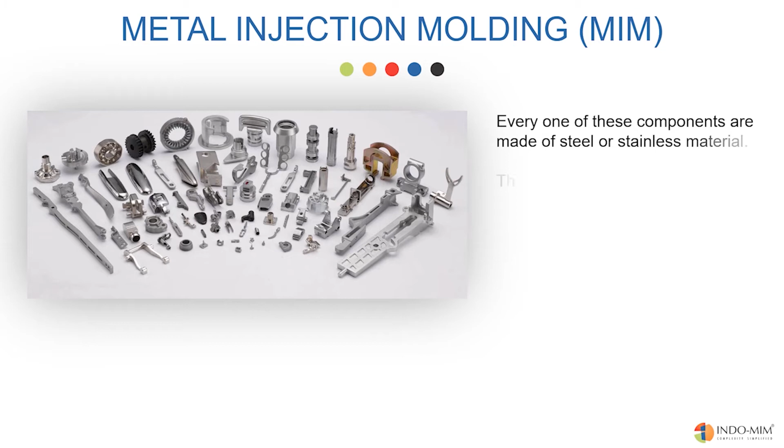Now, look at the pretty components on the screen. They are all made of steel or stainless material, and they are produced in high volumes, tens of thousands to millions per year. What if we asked you to produce them in a CNC machine shop? Impossible, right? Don't worry, we have Mr. MIM to your help. With the MIM process, you can produce thousands of parts per day without even getting near a metal cutting machine. Let's understand what this wonder process is.

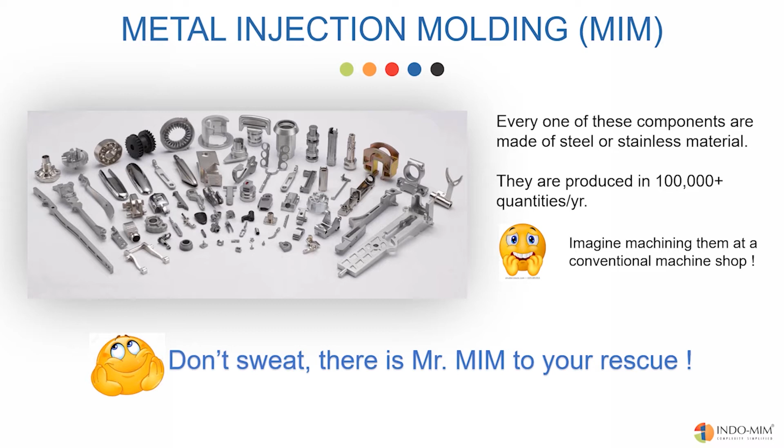Do you remember the conventional powder metal process? It's also called press and sinter. In this process, we take metal powders, press them with high pressure in a die using top and bottom punches, add some core pins to produce holes, etc. The pressed parts are sintered in a furnace to get to 90% of the material density. Great process, but not good enough, because the process can produce only two-dimensional shapes and poor material properties because of low density.

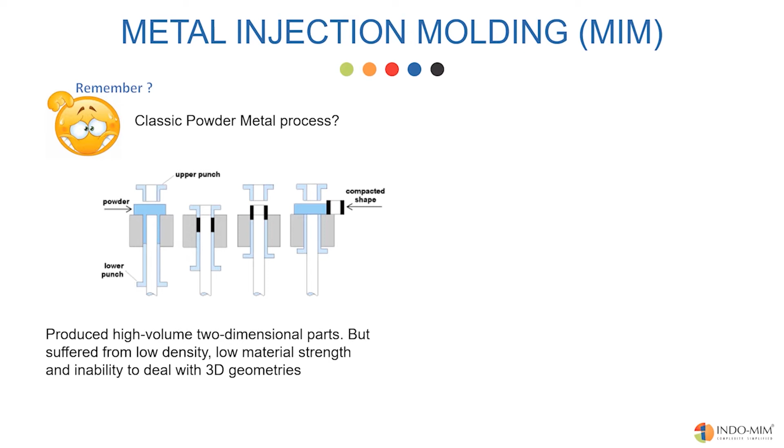Now, you also know the plastic injection molding process. Who doesn't? Injection molding process allows you to produce complex three-dimensional shapes. But this process can deal with plastic and low-melting materials like zinc and aluminum. Wait a minute. How about injection molding of the metal powders instead of just pressing?

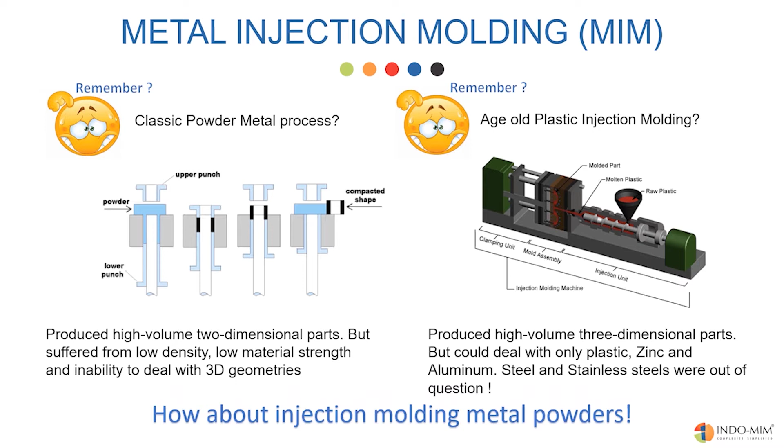You can't? No. Yes, you can. Just mix the powder with a little plastic binder. The mix flows like semi-solid material under heat and pressure. So, let's ask powder metal and injection molding to marry each other and see what happens. And they said yes. Metal injection molding was essentially a marriage between two existing processes, powder metal and plastic injection molding. The marriage happened around the mid-80s. Sorry, we weren't around. But here we are now to take the benefits of that marriage.

That's all that matters. Metal injection molding is a simple four-step process. Step 1: mix the metal powders with some binder, usually a mix of polymers and wax. Mixing is done under heat so that the binder material melts and coats each metal particle. This produces a homogeneous mix. The mix is converted into small pellets for easy storage and transfer. At this stage, the mix is called MIM feedstock.

Producing MIM feedstock is a highly specialized process. Most of the MIM companies buy ready-to-mold feedstock from a third party. We, at Indo-MIM, produce our own feedstock in-house. Producing feedstock in-house provides a lot of cost advantage, and we can monitor the quality better.

Step 2: the feedstock is injection molded into complex shapes using plastic injection molding machines. During the injection molding process, the MIM feedstock is heated just enough to melt the plastic. So essentially, we inject semi-solid material into a custom-made mold. A molded shape is only a consolidation of the metal powder with the help of plastic. At this stage, the parts are called green parts. The green parts should be handled delicately to avoid damage.

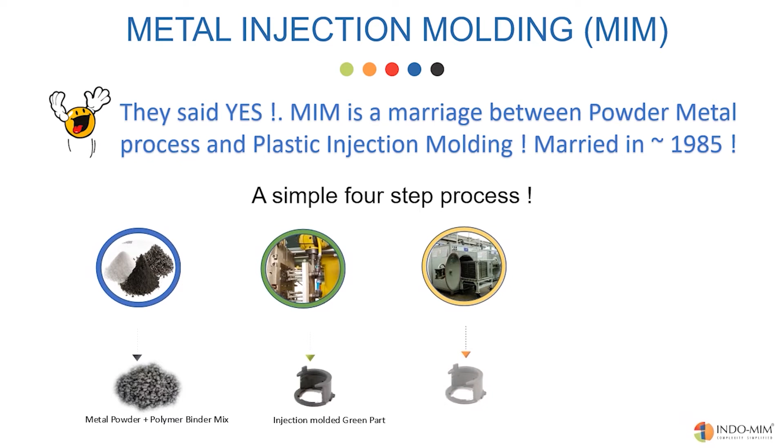Step 3 is to remove part of the binders. The process is called debinding. After this process, the components are called brown parts. The last step is to sinter the brown parts and remove all the binders added. During sintering, the high temperatures enable the metal particles to diffuse with each other to get to 97% minimum density.

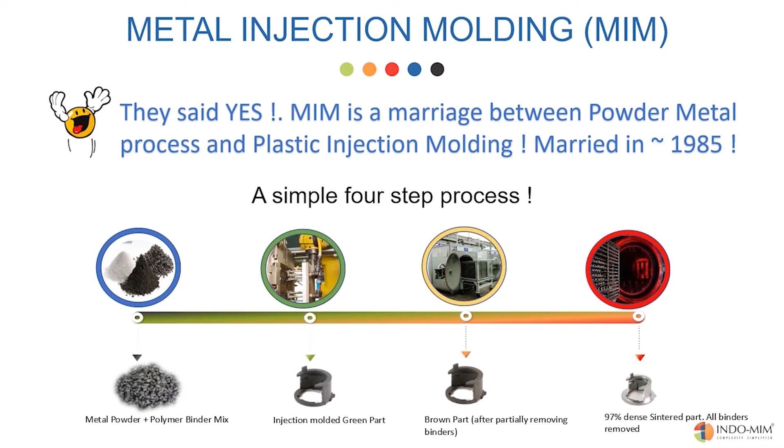After the sintering, the components are 100% metal with no binder material in them. Hence, they display very similar material properties as corresponding wrought material. So, we made complex shaped metal parts without even getting anywhere near a metal cutting machine. Still don't believe it? Let us watch a video of the process.

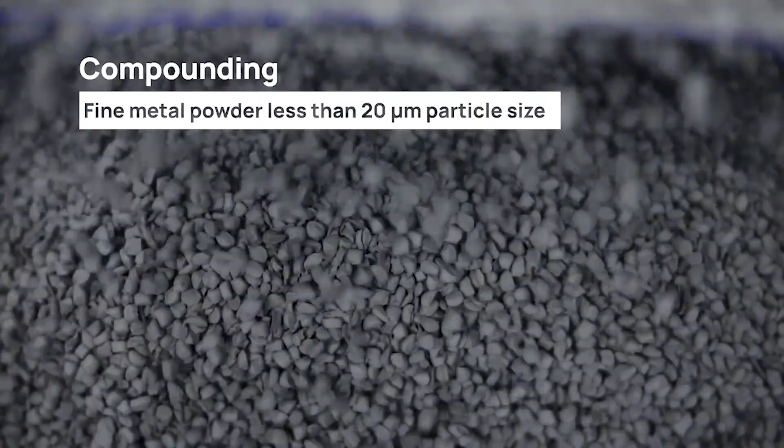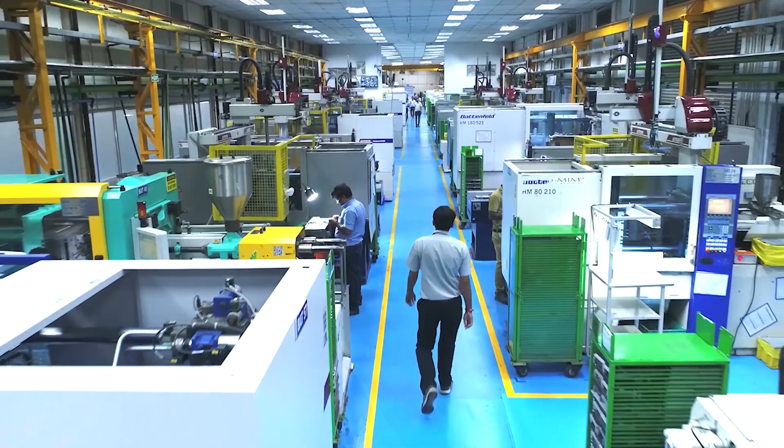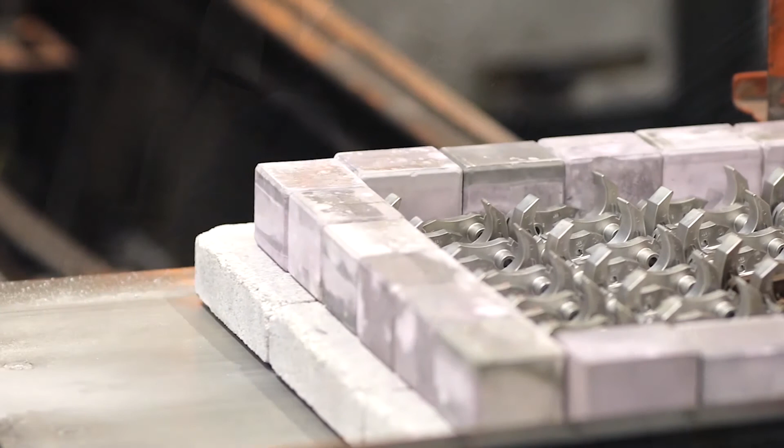This short video was shot at our plant in Bangalore, India. The MIM process begins with compounding, manufacturing fine metal powder which blends with thermoplastic and wax binders in proportional amounts to make the feedstock. The feedstock is injected into the metal mold to form the net shape at molding. After this process, the solvent extraction process is used for removal of primary binders at the debinding process. The last stage occurs in batch vacuum furnaces or continuous furnaces, to remove secondary binders and densify the component, which is coined as sintering.

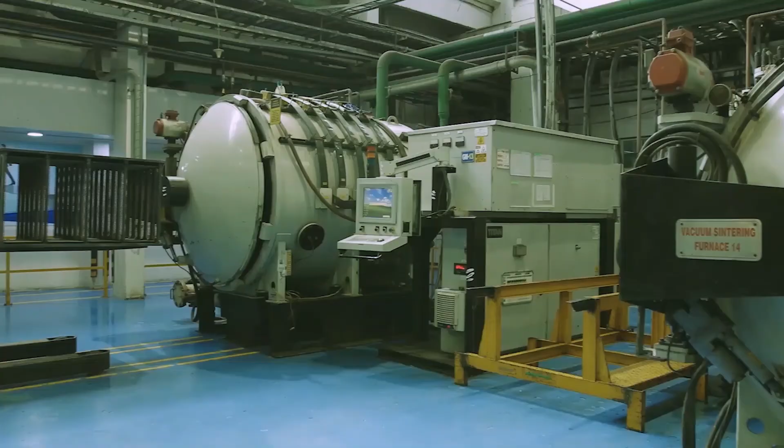After sintering, MIM goes for required heat treatment and special processes to enhance the material properties. The final products go through standard checks for quality assurance before being delivered to the customers.

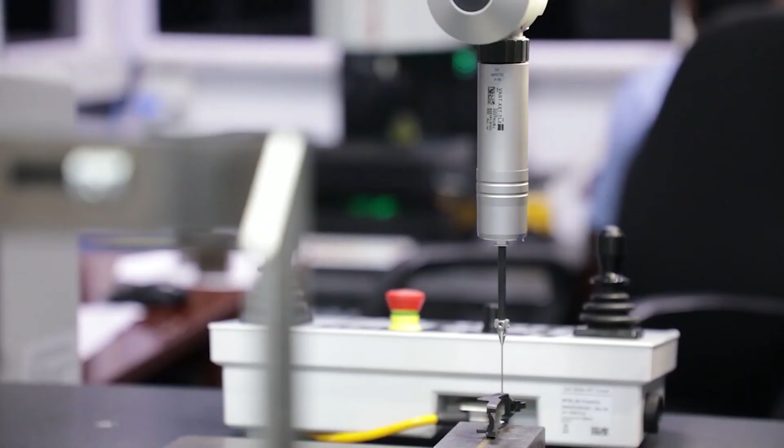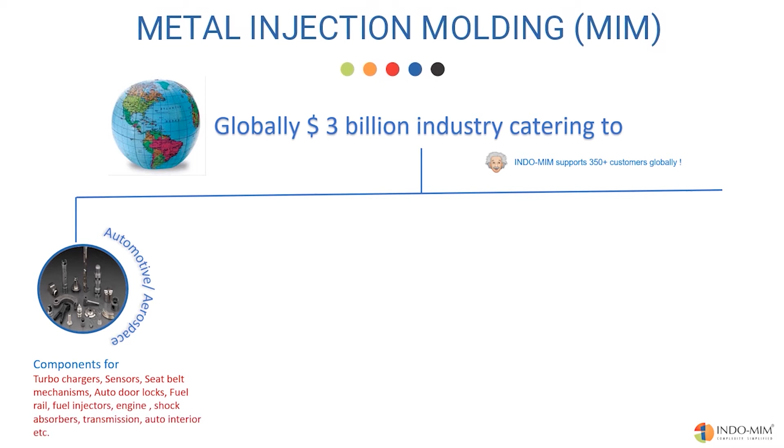What started as a science project in the 80s has grown into a $3 billion global industry, growing at 20%. Applications of metal injection molding are found in almost every known industry: automotive, consumer products, firearms and sporting goods, medical devices, and electronics are some of the broad categories of the global market.

If you have small intricate steel or stainless steel components, MIM will be your preferred process. Automotive companies like Garrett, BorgWarner, Mitsubishi, Bosch, ZF, Cummins, Caterpillar, etc. use a large number of MIM components in their assemblies.

The Lightning connector on your iPhone is a MIM component. Apple alone consumes $600 million worth of MIM components in a year.

If you own a handgun made in the USA, you've probably seen several MIM components on it. A typical handgun has 15 MIM components in it.

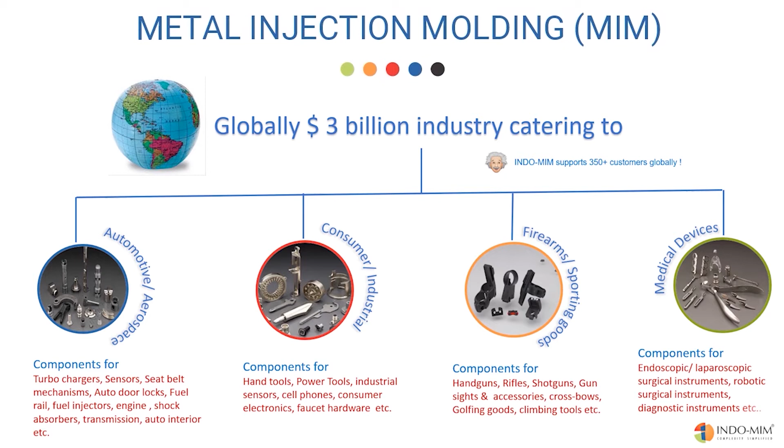Pretty much every mass-produced endoscopic or laparoscopic surgical device has MIM components in it. INDO-MIM alone developed 6,500 plus varieties of MIM applications in the last two decades. We service 350 plus customers globally.

Okay, looks like you're on board now. Let's discuss the nuts and bolts of the process in more detail.

Step 1 is mixing the metal powder with binders. This step is called compounding. Metal powders are normally produced through gas atomizing. The gas atomization process produces spherical-shaped particles. Round-shaped particles flow better during the molding process.

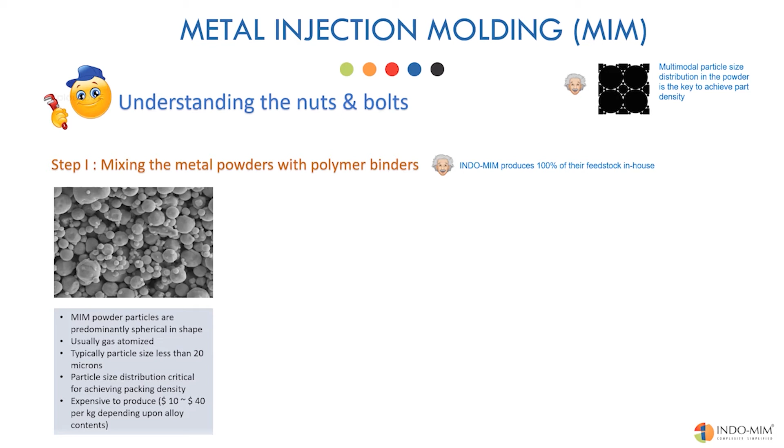Typically, MIM powder particles are less than 20 microns, significantly smaller than metal powders used for conventional press and sinter processes. The powder contains particles between 3 microns to 20 microns in precisely maintained particle size distributions. This is extremely critical to achieve the best possible powder packing in a molded component.

Metal powders can be an element mix of various alloying elements or pre-alloyed, depending on the final chemistry required. Most of the stainless steel and nickel superalloys are pre-alloyed.

MIM powders are expensive to produce because of the small particle size and tight controls on particle size distribution. They cost between $10 to $40 per kilogram, depending upon the alloy content. Most of the MIM powder producers are located in Europe, Japan, and China. MIM powder costs are among the main cost drivers in a MIM component.

Hence, larger size components don't make good MIM candidates. Normally, components less than 100 grams are economically viable through the MIM process. At INDO-MIM, we find the 0.20 to 30 grams weight range the sweet spot.

Binders are normally a mix of commonly available polymers and wax. Most MIM companies in the world use a wax polymer recipe for feedstock. The actual recipe is commonly considered proprietary information. As the metal powders are completely covered with the polymers during the mixing process, the MIM feedstock has a very long shelf life.

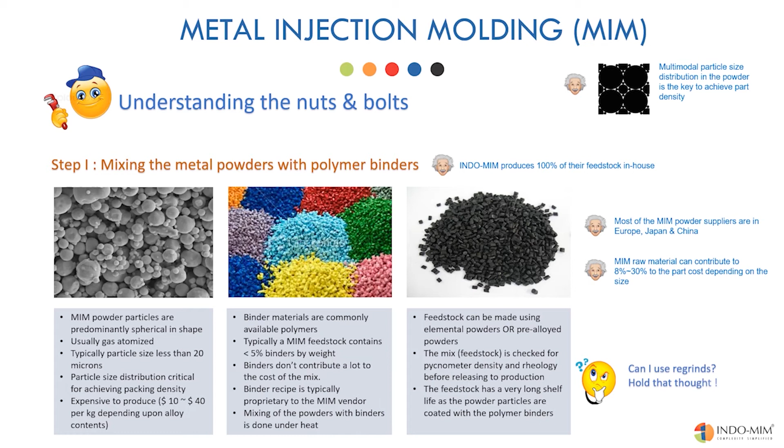The MIM process offers a wide variety of engineering steel, stainless steel, and industrial ceramics. INDO-MIM offers 80-plus material options, significantly larger than our nearest competition. Our in-house R&D material development team continues to add to the list on a regular basis. As you see, for every engineering application there is a MIM material option.

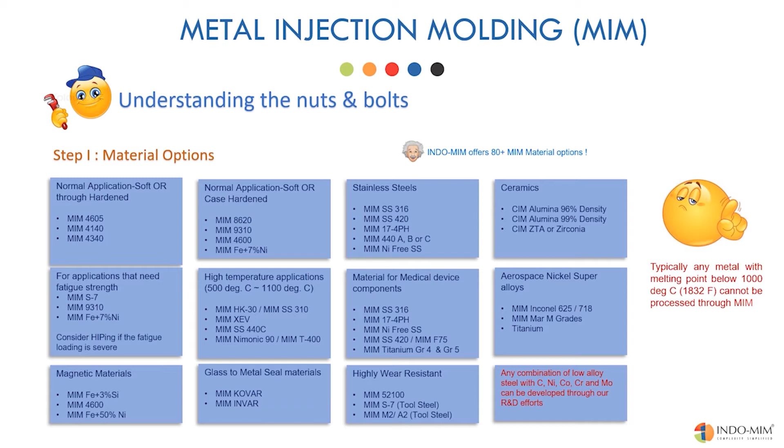However, please remember that any metal that melts below 1000 degrees Celsius, or 1832 degrees Fahrenheit, cannot be processed through MIM easily. Hence, you may not find a MIM company that would deal with metals like aluminum, zinc, copper, etc.

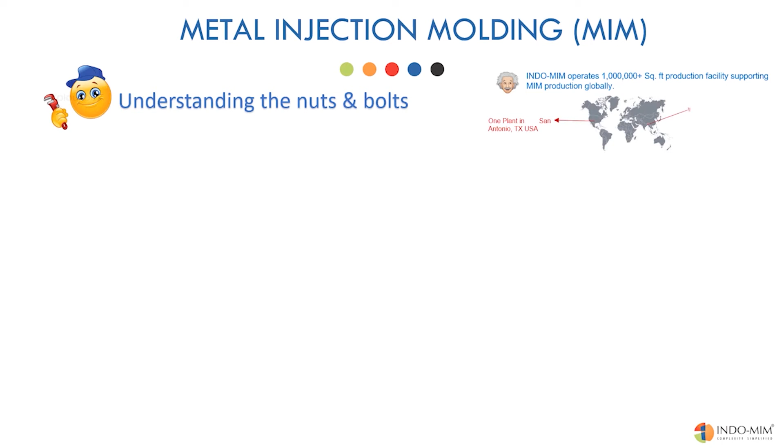Step 2 is injection molding of the feedstock. This process is very similar to plastic injection molding. As a matter of fact, we use the same machines used for plastic injection molding. However, there are some differences.

The molding temperatures are just enough to melt the binders added, so essentially we are injection molding a semi-solid material. Hence, MIM molding requires much higher pressure. This means MIM molding machines are usually oversized. Also, given that the metal powders are abrasive, the screw and barrels are made of special material.

During the molding cycle, the molds are both heated and cooled. The injection pressures, injection speed, and a host of other molding parameters are monitored using a closed-loop system. Hence, MIM molding machines are usually CNC controlled.

The molded parts, now called green parts, are normally picked by robots and placed on ceramic trays. Remember, at this stage they are just metal powder held together by plastic binders. They have to be handled delicately to avoid any damage.

The runners are normally reground and reused after mixing them with the virgin feedstock. We will discuss more about this in the subsequent slides.

Now let's talk about the molds. The molds are made with the usual tool steels, commonly used for plastic injection molding. However, as the MIM feedstock is abrasive, the mold life is usually smaller than in plastic molding. We guarantee 300,000 shots mold life before replacement is needed.

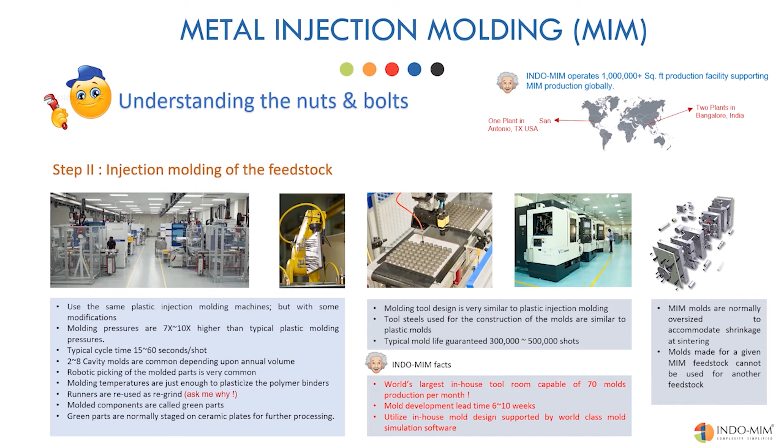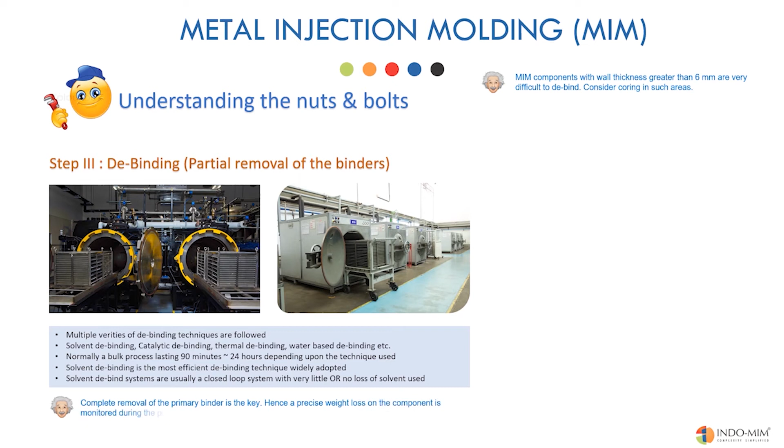Moving on to step 3. Once the feedstock is molded into shape, we don't need the plastic binders on the parts. The process of partially removing the binders is called debinding. The MIM binders are broadly categorized into 2 categories, primary and secondary binders. At the debinding stage, we remove the primary binders through a solvent extraction method.

Debinding technique depends on the binder recipe used. Some MIM vendors use catalytic debinding and some use thermal process. Solvent-based process is the most economical and efficient method.

As you can see, the green stuff inside the green part is all gone after debinding. The part at this stage is called a brown part. The weight loss on the components is closely monitored during the debinding process. The entire process is done in an automated closed-loop system. The solvent used in the extraction process is regenerated.

Debinding cycle times depend on the wall thickness of the parts. Thick-walled components take longer to debind. Components with wall thickness greater than 6 millimeters are difficult to debind.

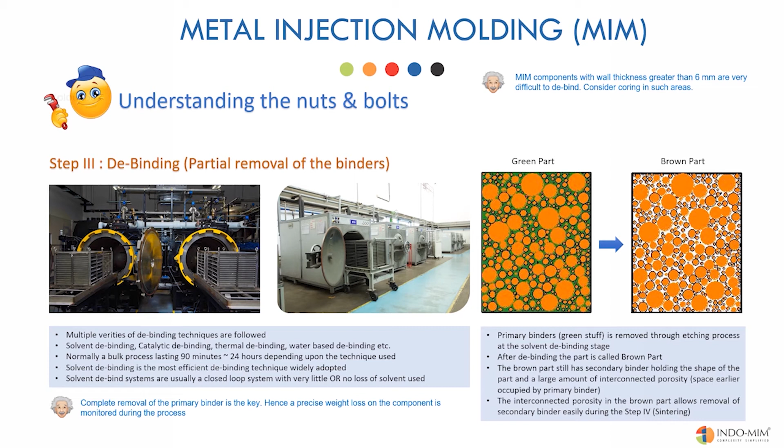During the debinding process, we achieve 2 important things. One, we remove the primary binders from the components. Two, we create a fine network of interconnected porosity in the component, which helps us remove the secondary binder during sintering, the last stage in the MIM process. All the space occupied by the primary binder is now a network of porosity.

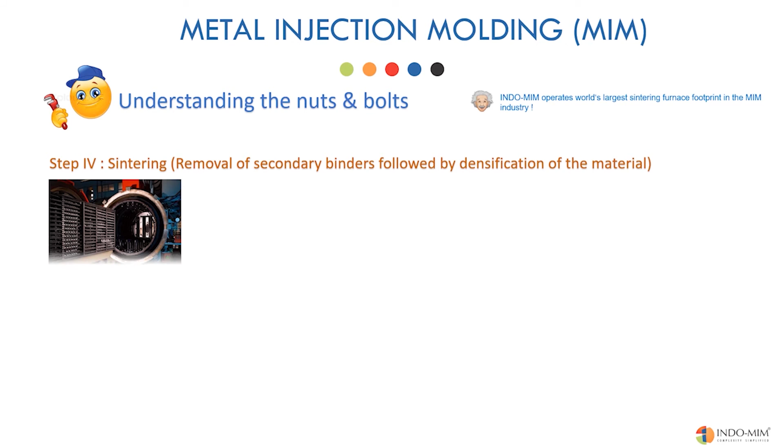Sintering is the last stage. Brown parts are now moved to sintering ovens. Sintering furnaces can be batch type or continuous type. Batch sintering furnaces are usually vacuum furnaces with nitrogen, argon, or hydrogen cover gas. Continuous furnaces use a combination of nitrogen and hydrogen gases as the cover gas.

Sintering temperatures depend on the material, usually ranging between 2,300 degrees Fahrenheit and 2,500 degrees Fahrenheit. Sintering cycles are between 25 and 35 hours long. The first 12 hours of the cycle are spent removing the secondary binders through a thermal debinding process.

After all the binders are removed, the furnace temperature is ramped up rapidly to the soaking temperature where the metal particles diffuse with each other. At the end of the sintering process, all the particle boundaries are replaced by grain boundaries. At this stage, the component shrinks by a specific percentage, squeezing out all the empty space left behind by the binders. The shrinkage is mostly isotropic, meaning the component shrinks at the same percentage in all directions.

Shrinkage percentage at the sintering stage varies by 1% total. This variation determines the dimensional tolerance achievable after sintering. Most MIM companies achieve dimensional tolerance on components within plus or minus 0.5% of the feature size. With better process control and equipment, it is possible to achieve plus or minus 0.25% of the feature size.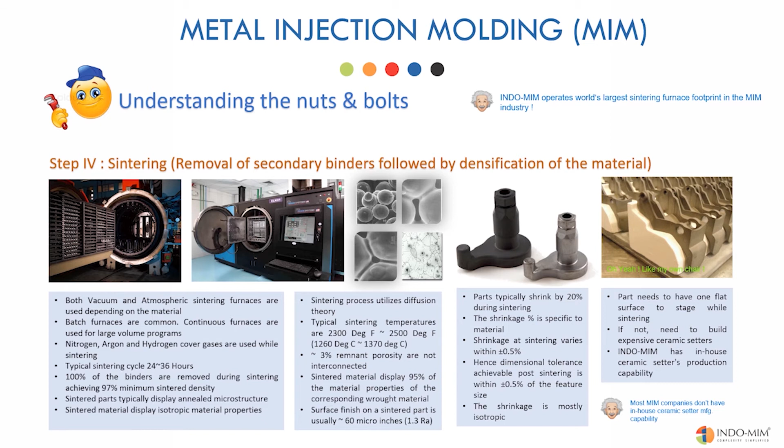Post-sintering, MIM materials achieve minimum 97% density. After sintering, the components are 100% metal, all binders gone. The remnant porosity in the material is not interconnected, hence it doesn't influence the material properties in any significant way. MIM materials achieve 95% of the corresponding wrought material properties. For most applications, this is acceptable.

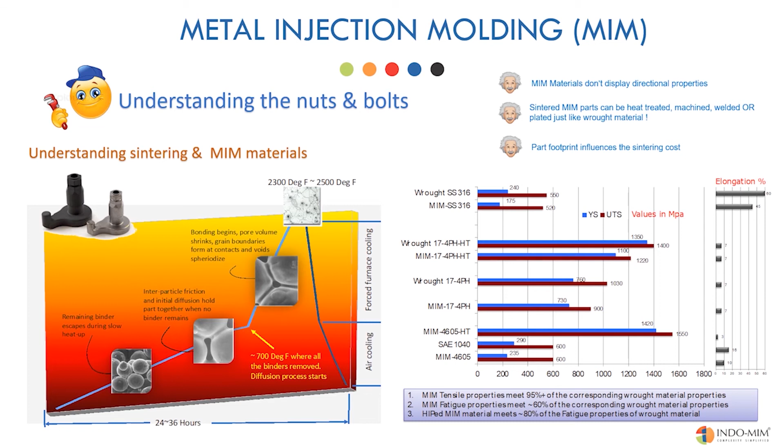However, remember that MIM materials don't exhibit directional material properties. Sintered MIM components can be mechanically worked, heat-treated, machined, plated, and welded just like wrought materials.

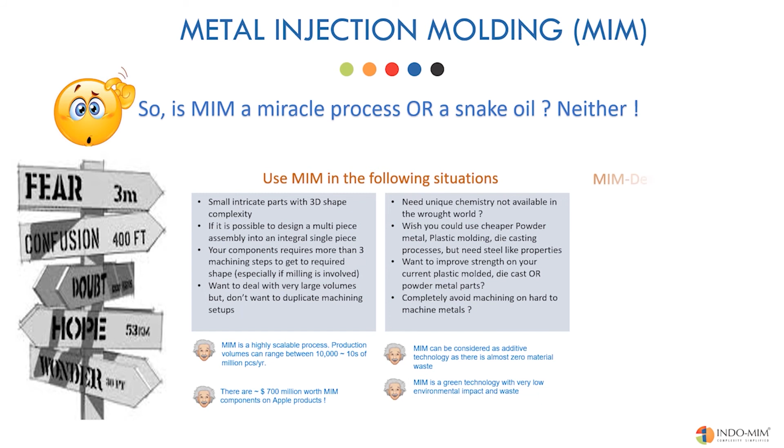Pretty cool process, huh? Is this a miracle process or another snake oil? I would say neither. Like all other metal working processes, MIM has some limitations and some great advantages over other processes. MIM is a highly scalable process.

We can address very low volumes, say less than 5,000 pieces per year, or we can address very high volumes, normally in several millions per year. The process can be easily automated to achieve very high productivity.

Here are the scenarios where you may want to consider the MIM process. You need a unique chemistry and the material is not available in the market. You want to integrate a multi-piece assembly into a single piece. You want to convert a plastic or zinc molded part into steel or stainless steel because the current version does not have the required material strength. You don't want to do complex machining on parts of high volume, especially if the material is hard to machine.

When you want to design a component with MIM as the manufacturing method, you have almost 360-degree design freedom. You can add additional or difficult features to the part without adding cost to the component. You can add different textures, logo to the component surface. Produce internal and external threads.

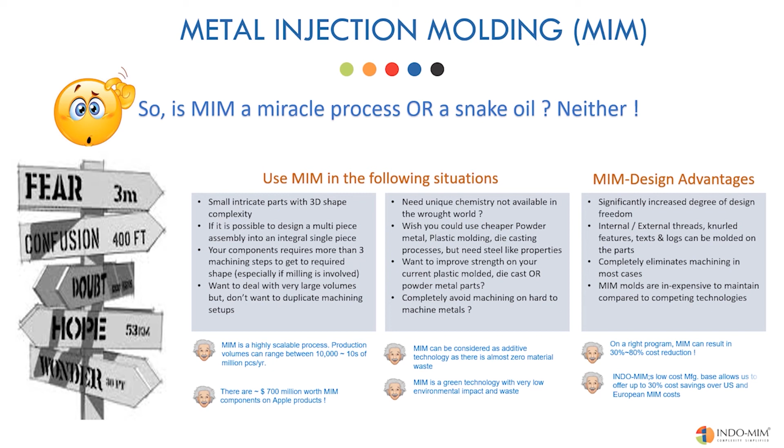Remember, on the right application, MIM can save up to 80% of the component cost. Still not convinced? Just send us a print or CAD model or even a sketch on a napkin, and we will let you know if you can save money.

Let's talk about the MIM design guidelines. The MIM process closely follows plastic injection molding. Hence, all the mold design rules applicable for plastic injection molding are generally applicable. If the component can be injection molded in plastic, we can mold the same part using MIM material. It's as simple as that.

Normally, products less than 50 grams and with footprint less than a maple leaf would be good candidates for the MIM process. However, the component should have enough complex geometry to compete with the conventional machining process.

When you consider MIM as the production process for a component, be prepared to accept gate and ejector pin witness marks on the component. Large corner radius, uniform wall thickness are all considered as good design attributes. Draft angles, where possible, are good for molding.

Minimum wall thickness should be 0.30 millimeters or 0.012 inches. Maximum wall thickness can be 8 millimeters or 0.30 inches. I would say the sweet spot is between 2 and 4 millimeters. Internal and external threads up to 6 millimeters in size or 0.25 inches can be easily molded.

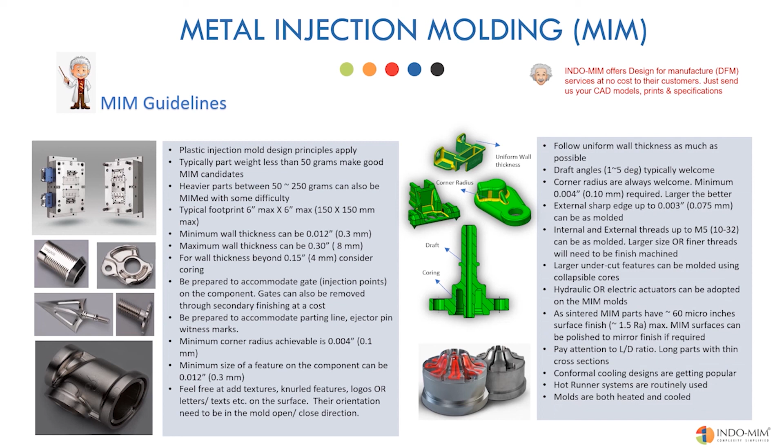Pay attention to length to diameter ratio. Long parts with thin walls are normally not good MIM designs. MIM mold designs have come a long way in the last 20 years. Conformal cooled mold inserts that are used in plastic injection molding are also popular among the MIM tool builders.

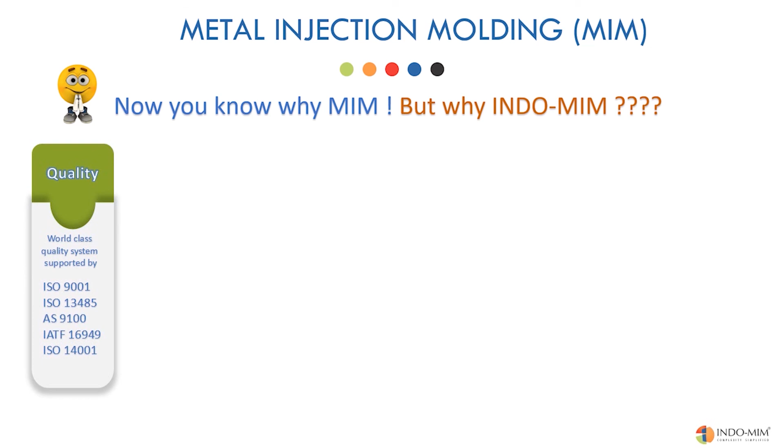Now that you have accepted MIM, the question is, why INDO-MIM? Several reasons, but the most important ones are quality. We have all the required industry-specific quality certifications. With 2 of our production plants located in low labor cost regions, we are generally up to 30% cheaper on product cost compared to a MIM company located in the USA or Europe.

Capacity: INDO-MIM has the largest installed capacity in the MIM industry. Tooling: our enormous in-house tool room can produce approximately 70 MIM molds per month. This enables us to achieve the shortest development lead time and lowest development costs.

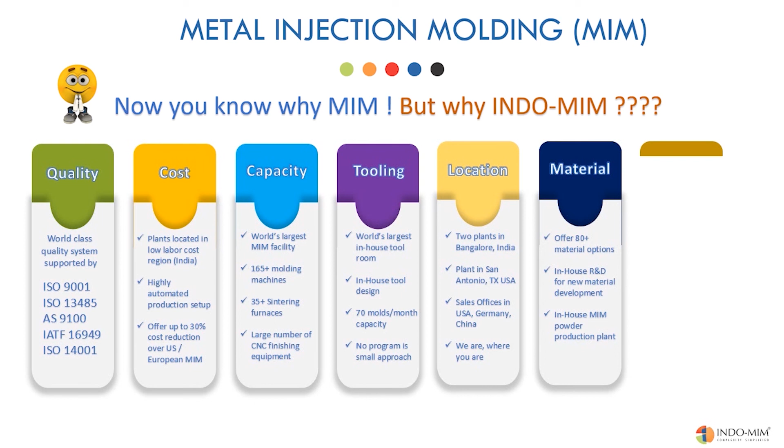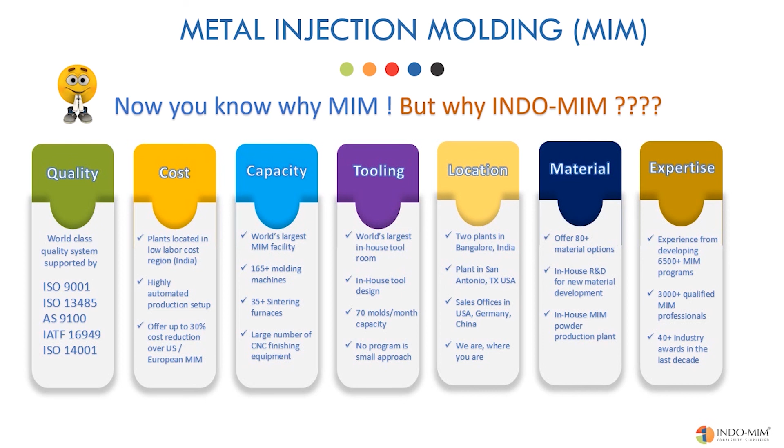Material options: we offer 80+ material options, way more than any of our competition. Experience: we developed 6,500+ MIM applications for our 300+ global customers from all the market segments. All these experiences are made available to you.

Finally, we are where you are. We have production plants in India and San Antonio, Texas, USA. Our sales offices and sales representative agencies are always at your call, and we can show up at your location within 24 hours notice. Our highly qualified engineers and sales professionals are available at your service round the clock, 365 days a year.